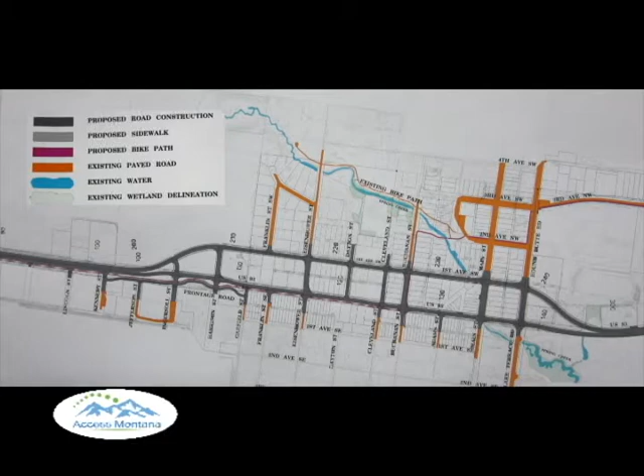This is an informational meeting encompassing the project known as CN 1744013, Ronan Urban. MDT and the consultants are here tonight to discuss a proposal to rebuild 3.5 miles of Highway 93 surrounding and through the community of Ronan.

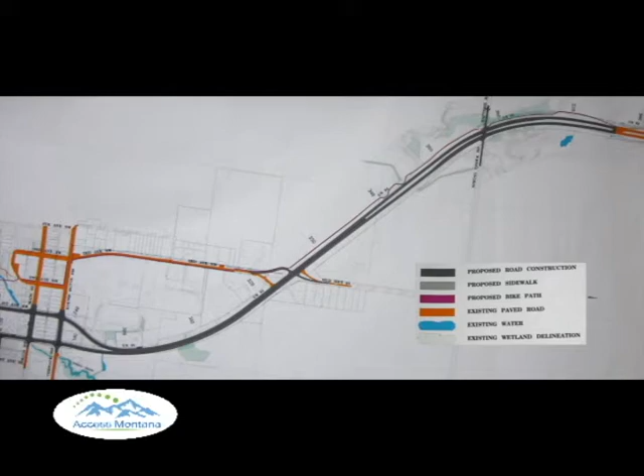Proposed work includes roadway construction of US 93, including reconstruction of First Avenue Southwest as a one-way southbound street and reconstruction of the existing US 93 as a one-way northbound street.

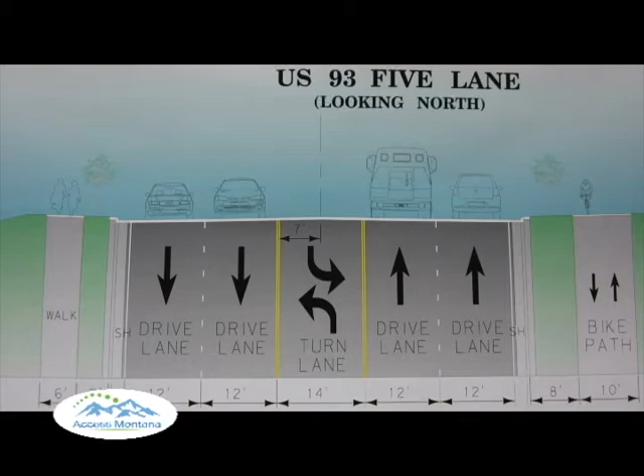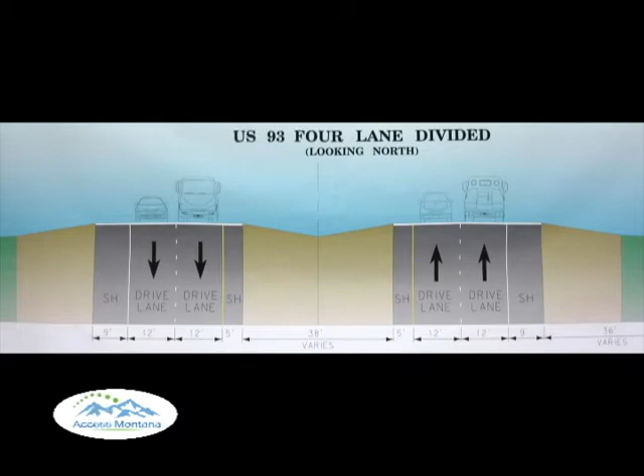Also installation of traffic signals, sidewalks, and construction of a separate shared use bicycle pedestrian path, which will affect City Park. The purpose of the project is to improve capacity and safety by widening the roadway with additional through travel lanes, installation of turning lanes, and to improve non-motorized travel by construction of a separate shared use bicycle and pedestrian path along the length of the project.

My name is Shane Stack. I work for the Montana Department of Transportation out of the Missoula office, so we're fairly familiar with the area.

We're looking at 2017 for construction. We do have money set aside for the project. We're at about $23 million, so we're hoping to make sure that Stelling keeps it on time and on budget, and if we can do that, we're hoping to be under construction in 2017.

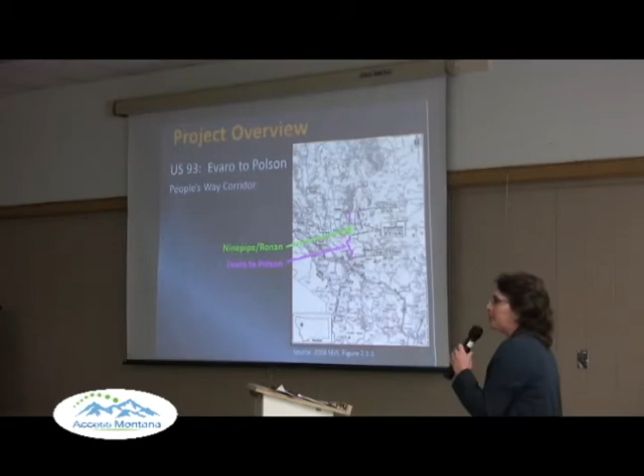My name's Kathy Harris. I'm with Stelling Engineers, and we're really pleased to be here tonight, and thank you as well for coming. Project overview: the US 93 Evaro to Polson corridor is a 56-mile corridor.

I realize you really can't see this map real well, but Flathead Lake is up here. We go all the way down to Missoula. That's a 56-mile corridor that has been improved over the past approximately 10 years.

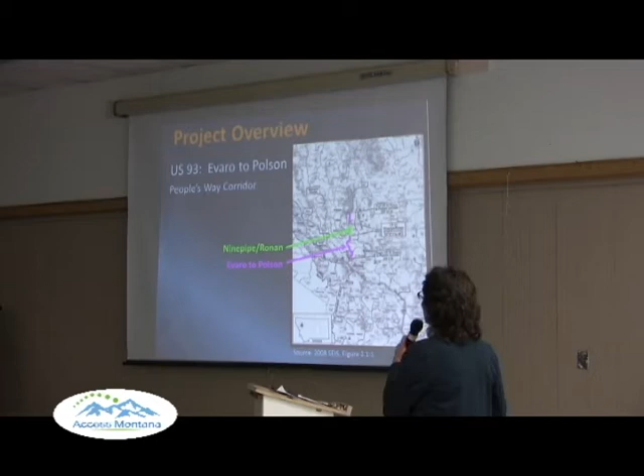The pink portion shows that Evaro to Polson area. Within the middle of it is about a 10-mile segment called Ninepipe to Ronan. That segment has not been improved or widened yet.

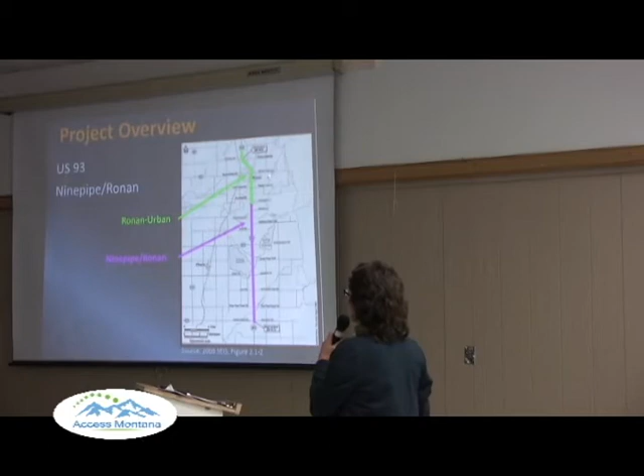Ronan Urban is a 3.5-mile project at the north end. Our project is going to start at the south end at the Jore driveway or Innovation Lane. We'll continue up through town and continue north all the way to north of Spring Creek Road.

Where we tie in with the new and improved, well, not so new, but the widened US 93 roadway that goes up to Pablo and onto Polson.

Overall, the US 93 transportation system was identified that we needed to improve mobility, level of service, the roadway itself. This helps improve traffic flow. Are you stuck behind a car for 3.5 miles before you can safely pass? Do you end up coming up behind a left-turning vehicle and almost rear-ending them? Those are the kinds of things like level of service and traffic flow.

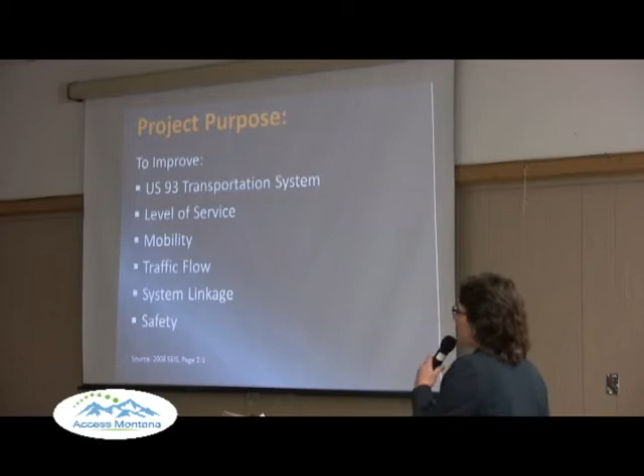Also, system linkage and safety. These were all identified previously in the environmental document to say this is what we're trying to improve. We actually have a need for this project, and you folks drive it every day. You know more than we do as the engineers what the needs are.

But this pretty succinctly says it: the road doesn't meet current design standards. Design and safety standards are not out there. You experience congestion. The accidents are 3 times, or almost 3 times, the average per mile as the statewide average for a similar roadway. That's a terrific amount. Similarly, accident severity, which means injuries or fatalities, is much higher than other roadways in the state. So those are the safety issues.

We also have limited bike and pedestrian facilities. Want to give you an idea, the road, we talk about traffic volumes, that's the number of cars on US 93 right now. And sadly, engineers, we look at an average across the year.

You know it's much higher in the summer than it is right now. But overall, throughout the year, the average - actually we're using 2009, but it's not much more in our current year of 2013 - the average you see right now is almost 11,000 vehicles a day on US 93. That's projected to double in the design life of this project. Now that's a ways out, but over 20,000 vehicles per day on US 93 as an average.

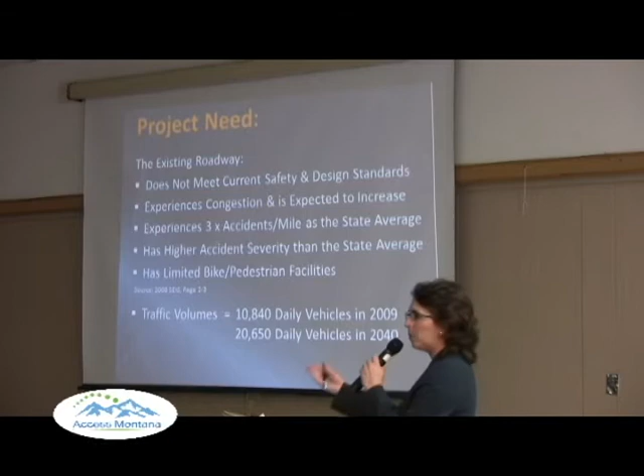And our design life is 20 years after we build the road, so we want to build a road that's going to work for 20 years. We look at specific objectives that we're going to try to fix or improve on the roadway. I apologize, this is a lot of text, so I'll just summarize it real quickly.

First of all, safety and accidents: reduce the number of accidents. I mentioned earlier we are 3 times the state average. We want to reduce that. We know accidents will happen, but we want to reduce the chance of them.

Improve capacity. That means make it so the road can carry double the traffic it's carrying now. That typically means more lanes of traffic, so instead of 1 lane going north, we want 2 lanes going north. Improve the intersections, specifically in Ronan.

There was a comment that we also want to improve it without dividing Ronan. We also want to reduce vehicle-animal conflicts. Those happen a lot in this area, and it was identified we want to try to reduce those. Improve wetlands, respect the current CSKT culture.

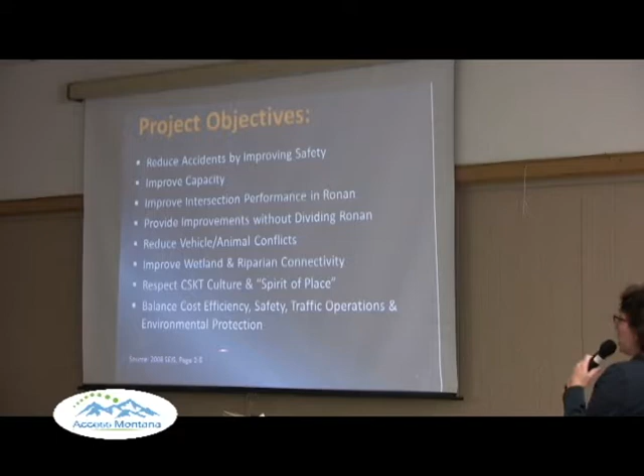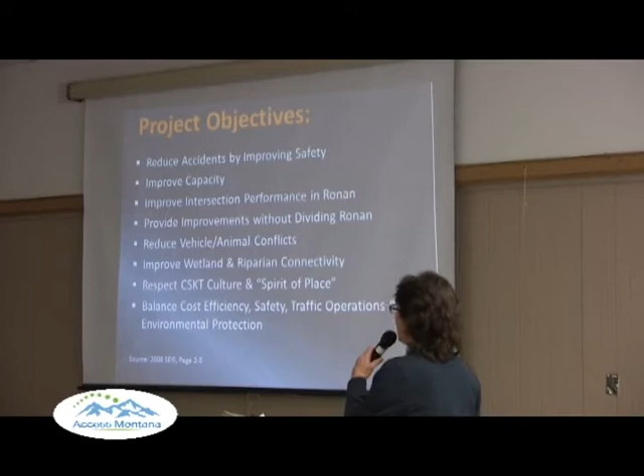And the one at the bottom is rather an important statement: we seek to balance the cost efficiency of this $23 million improvement with safety, traffic operations, environmental protection, which also means protecting right-of-way, protecting people's lands as best we can.

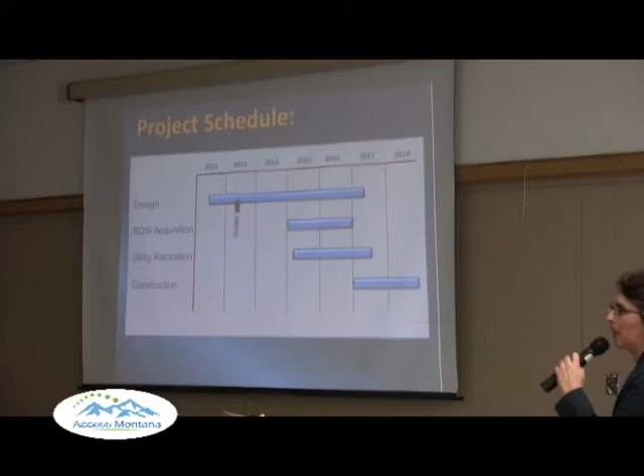We're in the design stage, and this will take us many years. Design should be finished about 2016, possibly early 2017. The right-of-way acquisition, acquiring land from the individual landowners, is expected to begin in 2015 and take approximately 2 years. We have approximately 200 parcels of land that we will be impacting.

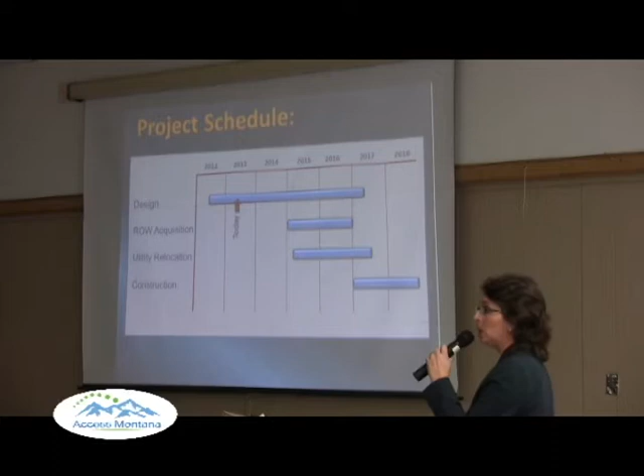Some of them we only need to rent a temporary strip during construction. Some of them we need to acquire a large piece of. Some of them we may need to acquire the entire lot.

Right-of-way acquisition usually occurs about the same time as utility relocation. Relocations could take 2 years; they'll probably start in 2015, maybe a little later in 2016. That isn't determined yet, it's a very floatable date.

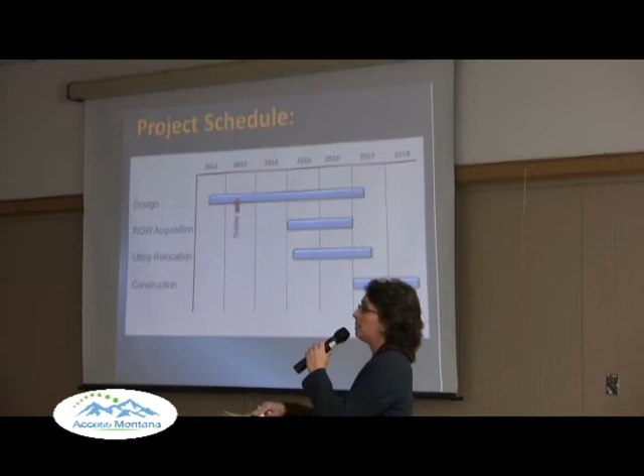As Shane identified, funding is available in 2017 for constructing this job. We anticipate it will likely take 2 construction seasons, though it's possible it could take 1. That doesn't mean 2 years of the road in front of your particular property being torn up, but it does mean 3.5 miles of roadway will be impacted for potentially 2 construction seasons.

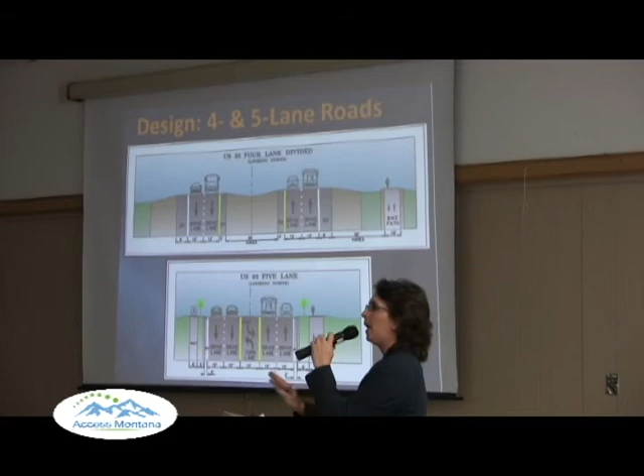This is a fairly significant issue because with this divided roadway, we don't have the ability to have safe left turns at every driveway, so we have to move them out. We met with many of the landowners to talk about this issue. It really has big impacts to the south of town, but to the north, there aren't as many impacts because we have large farm frontages.

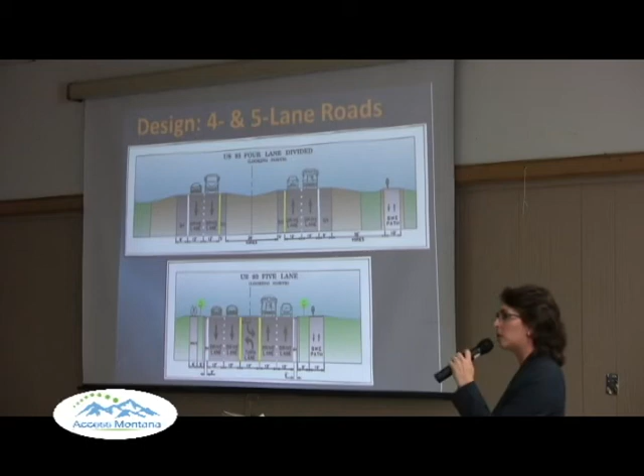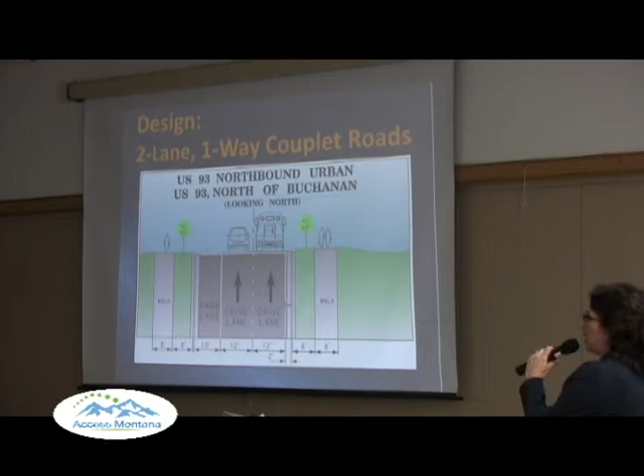When we come into town, we have what's called the one-way couplet. We're going to have 2 travel lanes going the same direction. Where possible, we'll also put in about a 10-foot parking lane, and I say where possible because if you have a driveway or an alley, we aren't going to be able to have that parking area. We're also going to put sidewalks on both sides of the roadways, on both US 93 and First Avenue.

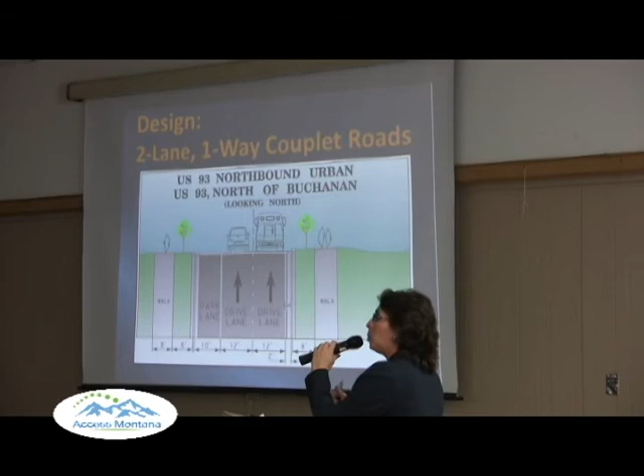We'll have sidewalks on both sides. This particular picture does not show a 10-foot wide bike trail, but in some sections of US 93 we'll have that wider trail instead of a sidewalk. US 93 itself will be about the same width as it is now. This will be on First Avenue, where those 2 lanes will be heading south.

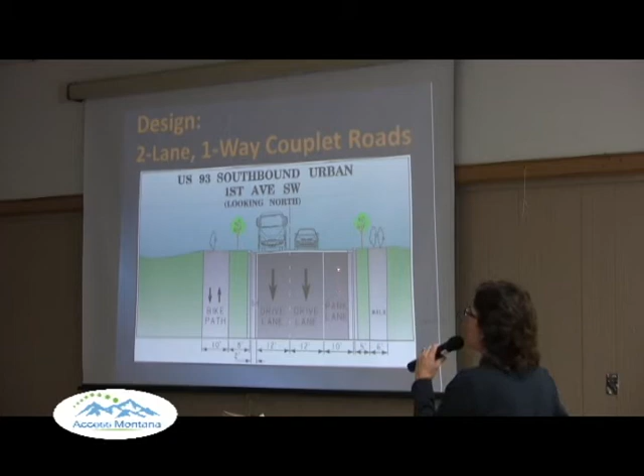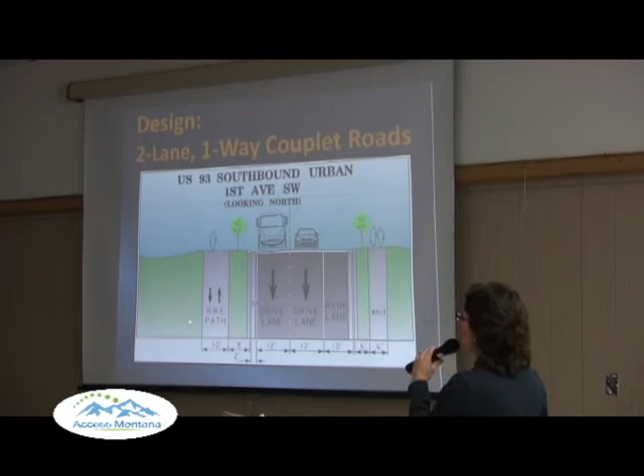We'll also put a parking lane where possible along First Avenue, and I stress where possible because we have to work around driveways, alleys, and when we get to an intersection we pull it back. We'll have sidewalks on both sides, and in some locations a wider 10-foot path. This will be the road in front of the city park, continuing all the way down through town.

In Ronan, we actually propose to have 6 traffic signals. The signals will be where they are now, at Eisenhower Street and up at Round Butte, but we'll have them on both US 93 and First Avenue. We'll also put signals in at the intersection with Buchanan, the street on the south side of the park.

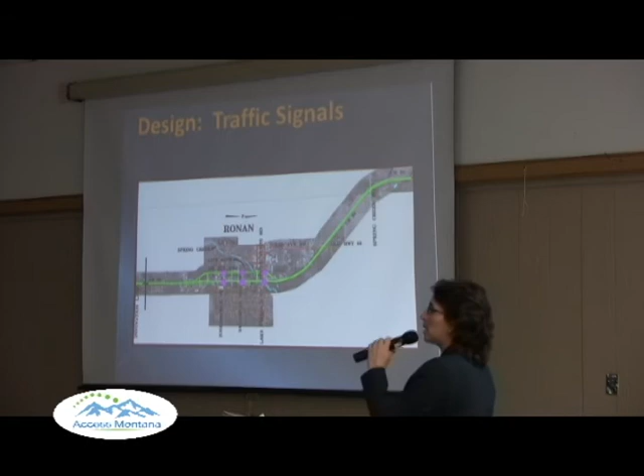At that point, our original environmental document recommended we bring it all the way down 3rd Avenue to Buchanan, run the trail east to US 93, and then run along the east side of US 93 down to Innovation Lane, at the Jore Corporation.

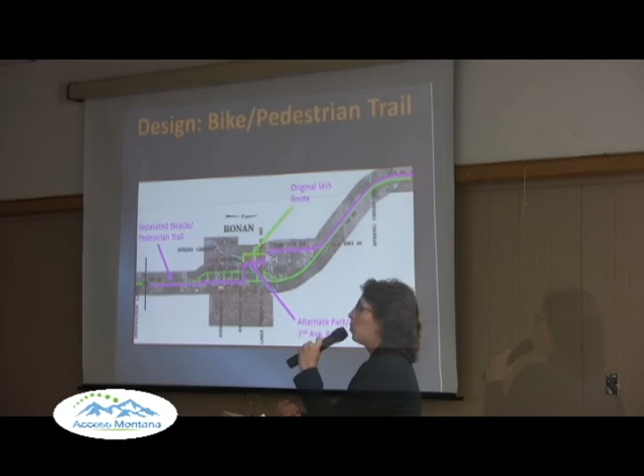We proposed an alternate that would actually run through the park itself. Instead of running down 3rd Avenue, we proposed to bring the trail through the park. One of the big changes would be, as we go into the park—a little hard to see—this is the current bridge over the stream.

We'd actually replace that bridge because we want a wider bridge, with a little flatter slope going up to it, so it meets a grade suitable for a wheeled stroller or wheelchair. It's a little steep right now on both sides. So we'd replace that bridge structure and put a 10-foot wide trail atop the current trail.

That's the proposal. One other area that's a little unique to this project is a proposed frontage road, which ties back into access. At the south end of town, this is actually Kennedy Street, probably more familiar as between McDonald's and Cenex. From Kennedy Street up to just south of Valley Bank, just south of the White Elephant, we propose to put in a frontage road.

That would be how all these businesses on the east side can get on a 2-way frontage road and then come over to an intersection at Kennedy, or up here at this future street, Harrison, which is where they would get on or off US 93. This ties back into trying to reduce conflicts and make it a little safer. That 2-way frontage road would provide access to the businesses.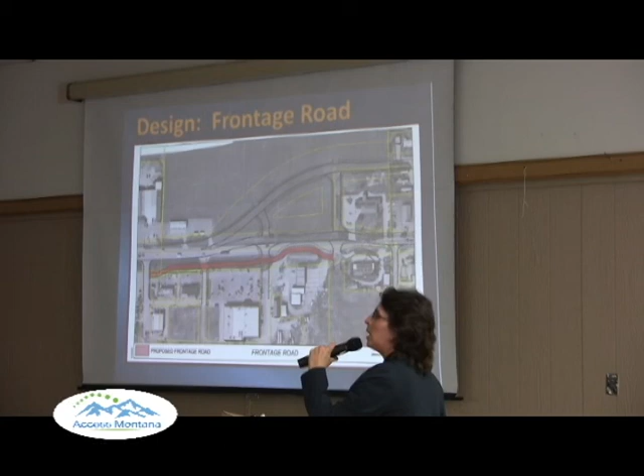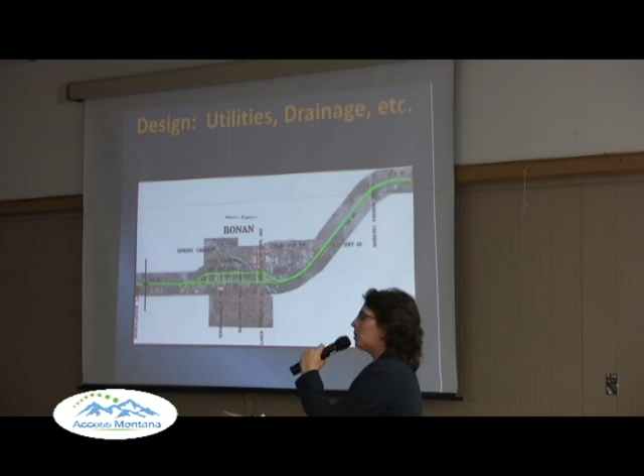There are similar frontage roads up in Pablo and one in Polson. It's an area where we can get commercial driveways off of US 93 and still provide access to the businesses. We are aware there is a tremendous amount of underground and overhead utilities in this area, and with our project, many of those will need to be buried a little deeper or moved outside of the roadway.